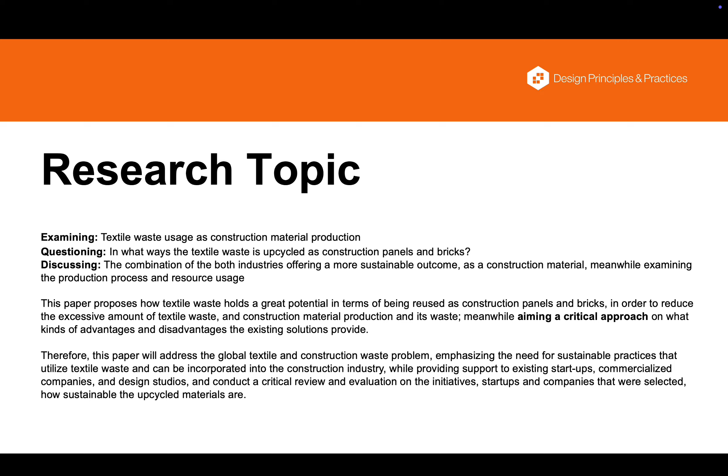A literature review was conducted using the databases Web of Science, Scopus, and Google Scholar. The keywords used during the literature review were textile waste, ready-to-wear clothing, textile waste as a construction material, textile waste upcycling, construction bricks, and construction panels.

The company's social media accounts, including Instagram posts, websites, LinkedIn profiles, and YouTube videos related to the projects, as well as the deliverables of various exhibitions, were examined to obtain further information about the initiatives and their proposed material processes.

Additionally, comments on the company's or the initiative's social media were also considered to understand people's thoughts and perception of these products, thereby establishing a connection between their perceptions of upcycling and how they view these companies and their products.

Based on the information on different brands and artists, the products were analyzed by their primary materials, textile waste type, additional materials, if disclosed, the binding agent used, production process, material properties, and the areas of use.

The initiatives and firms, FabBRICK, Ackermans x Wastecrete's FΔBRIC, STRADE, Upcirq Tex-Tile and Fashion Bricks Private Limited, Refurbric Innovations, Textile Refuge, Wendy Andreu, Feltouch Acoustics, and Sandra Junele's JUNELE were found.

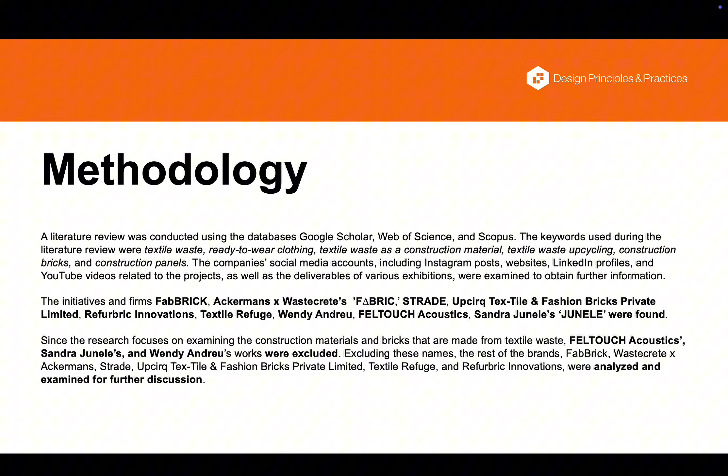Since the research focuses on examining the construction materials and bricks that are made from textile waste, Feltouch Acoustics, Sandra Junele's JUNELE, and Wendy Andrews' works were excluded. This part will be mentioned in detail in the upcoming slides.

Approximately 92 million tons of textile waste are generated worldwide each year. Between 2000 and 2015, textile production doubled, while the average lifespan of garments decreased by 36%. Recognizing that the fashion industry not only utilizes cotton but also incorporates other natural or synthetic fibers, the fibers that are not recycled are a concern.

According to Euromonitor International, the amount of textile waste recycled in EU countries from 2019 to 2025 in tons was 1,143.4 thousand tons in 2019 and 952.6 thousand tons in 2025. One of the main reasons is that the industry rapidly manufactures clothing in response to trends, keeping the fashion brands alive.

Another reason is that the growing demand for clothing, fashion trends, and fast fashion, which is most preferred, has also significantly increased the production and consumption of clothing.

It is forecast that global textile waste will grow at an annual rate of 60% between 2015 and 2030, resulting in an additional 57 million tons each year, bringing the total to 148 million tons. And when textiles are no longer in use, or not recycled or upcycled, they are either landfilled or incinerated, resulting in a global textile waste rate of 73%.

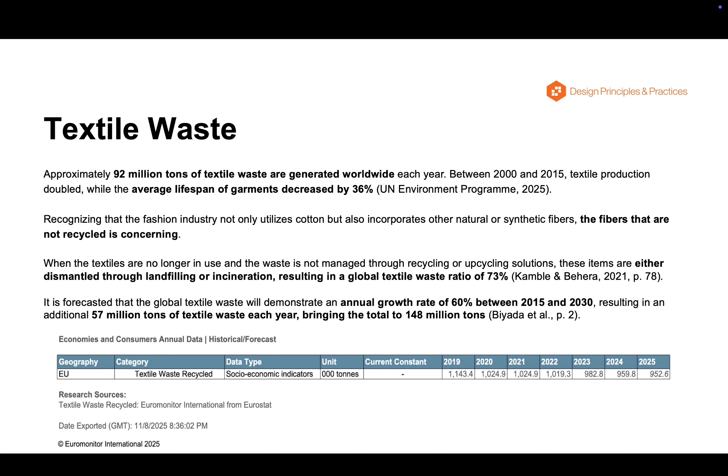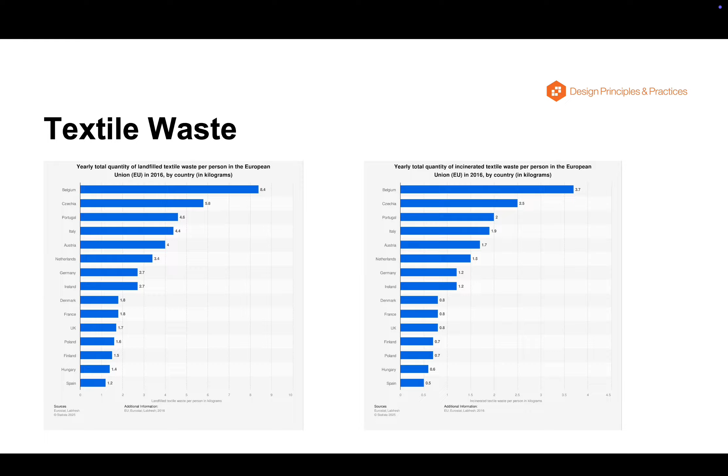According to another statistic provided by Statista, the annual total quantity of landfill textile waste per person in the European Union in 2016 again starts with Belgium with an amount of 6.4 kilograms, followed by Czechia with an amount of 5.8 kilograms, and Spain being the last one with an amount of 1.2 kilograms.

Demands on construction materials. Along with the textile industry, the construction industry also has a profound impact on the environment. In Europe, the construction industry consumes a significant amount of energy, and according to Statista, 38.43% of waste generated comes from it. Additionally, construction and demolition activities produce more than 11 billion tons of waste, with concrete debris accounting for roughly 50-70%

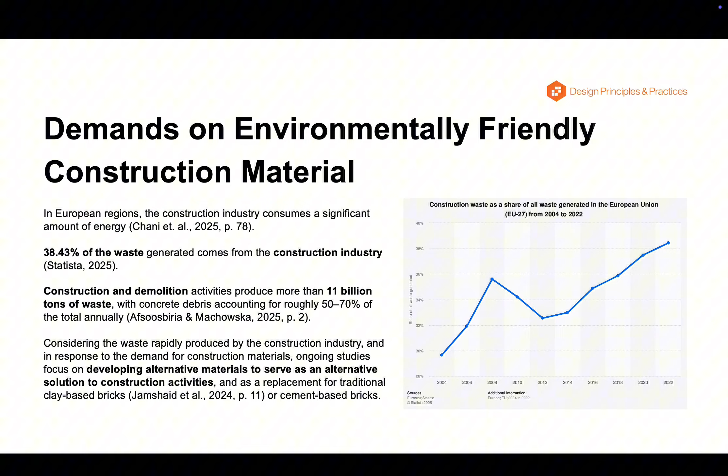of the total annually. Thus, as the construction industry generates rapid waste and demand for construction materials continues, ongoing studies focus on developing alternative materials to serve as solutions for construction activities and as replacements for traditional clay or cement-based bricks. Given the rapid production of textile waste by the textile and fast fashion industries and the emerging and ongoing demand for sustainability, it is crucial to adopt more sustainable practices for the utilization and repurposing of textile waste. Therefore, the construction and textile industries have the potential to utilize textile waste in construction to reduce the negative environmental impact generated by both industries.

The initiatives and firms FabBRICK, Ackermans x Wastecrete's FΔBRIC, STRADE, Upcirq Tex-Tile and Fashion Bricks Private Limited, Refurbric Innovations, Textile Refuge, Wendy Andreu, Feltouch Acoustics, and Sandra Junele were founded.

And since this research focused on examining the construction panels and bricks that are made from textile waste, Feltouch Acoustics, Sandra Junele, and Wendy Andreu's works were excluded because Feltouch products are used in wall panels, ceiling panels, ceilings, lighting, cladding, hangings, and fillings, which are made from PET felt and advanced fibers through a heat pressing technique.

Wendy Andreu utilizes salvage waste in collaboration with a performance fabric company and uses water-based solvent-free acrylic resin as a binding agent, and exhibited them at Dutch Design Week in 2019.

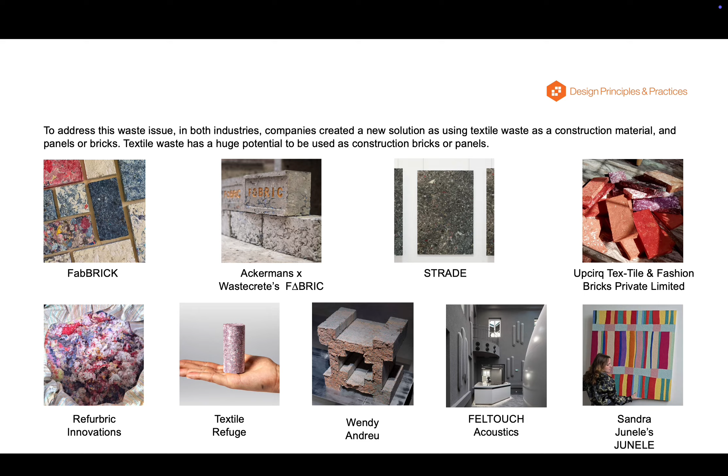Excluding these names, the rest of the brands were analyzed further. Based on information on different names, the products were analyzed by their raw materials, the textile fiber type, additional materials if used any, and the binding agent used if disclosed, in terms of their ingredients as well as the production processes, material properties, and the areas of use.

Because it was decided that according to the studies, providing these properties of the companies, the ingredients that they use for production are the most beneficial in terms of producing the material and tackling its usage areas, while also mentioning the material properties. In this table, I will be providing the details of the initiatives and companies that upcycle textile waste into construction panels and bricks.

FabBRICK is a French company which was established in 2018. The raw material that is used is textile waste, and the textile fiber type is miscellaneous, meaning that this company shreds the textile waste, including the buttons, zippers, or anything that's on the garment.

The additional material here is natural binder, and the binding agent, in terms of its ingredients, is a secret recipe, but they call it eco binder. The quantity of water usage on materials, if there's any, is not specified or disclosed.

And the production technique consists of the company shredding the textile waste, pouring it onto molds, and pouring the eco binder inside the molds. They squeeze out the excessive binder manually, take the pieces out of the molds, and leave them to air dry for 10, 12, or 15 days, maybe 2 weeks.

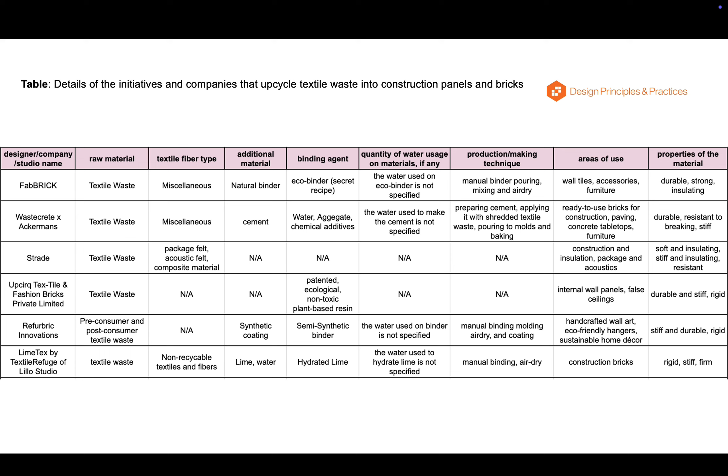They are currently refining their construction material, called Limetex, through extensive testing to elucidate its properties further. They are testing different properties. The properties of the material are rigid, stiff, and firm.

It is interesting to note that numerous startups and companies are working on upcycling textile waste into construction materials, such as bricks and panels. Examining these initiatives, it becomes clear that they all serve an essential purpose: upcycling textile waste into new products. The idea of using textile waste as an alternative to existing construction materials seems promising.

Utilizing discarded waste materials in brick production not only contributes to environmental protection, but also enables the development of sustainable, visually appealing construction materials. One of the main positive impacts of these initiatives is that they utilize local textile waste, thereby reducing the excessive amounts of textile waste produced by manufacturing parties and post-consumer textile waste, which is beneficial.

These solutions have been available for a while. However, implementing these practices in real life is still entirely new. Although these products hold great potential for the future, they also come with challenges.

The bricks are not fully ready for use in construction, as this type of product requires more research, development, and prototyping. Therefore, replacing traditional bricks with textile bricks is discussed and debated, because incorporating textile waste into each product can change strength and endurance, potentially showing significant differences compared to traditional bricks.

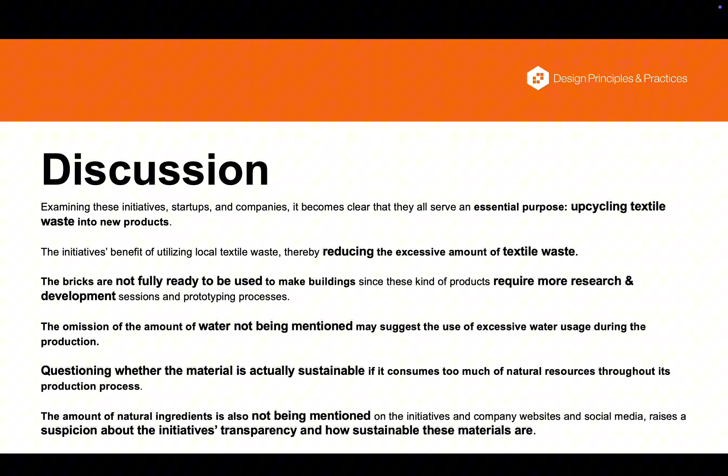This raises suspicion about the initiative's transparency and the sustainability of these materials, even though they are made from textile waste and repurposed into a new product using a natural binding agent in some of them, allegedly.

As for the conclusion, based on the analysis and findings, the intended bricks and panels made from textile waste are still being tested and evaluated to determine whether they are ready for reuse in the construction industry.

Additionally, the bricks are not fully ready for use as bricks in the construction industry because they have difficulty with load-bearing capacity and tensile strength, despite being good insulators. According to current analysis, most bricks are produced for use in wall panels and insulation.

The demand for these materials is still not very known. This could be about people not being ready to change their habits when doing construction, pricing differences compared to existing materials, or these initiatives not being recognized enough online.

Most of the initiatives are still in the research and development stage, and only a few of them have been commercialized. As most of the initiatives are newly established, their resources for reviewing and analyzing tend to be limited, and the details provided may also be insufficient.

The solutions that use textile waste as construction panels and bricks are currently open to further study, including examining their water consumption, conducting case studies, and contacting the companies for obtaining further information and detailing this not yet known area.